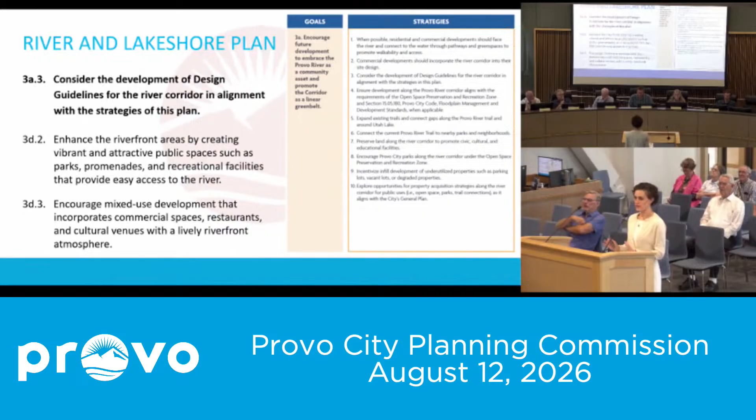Some of those are highlighted here on screen. The rest are fully listed in your packet, but this plan, the River and Lakeshore Plan, was very much the guiding document for the rest of the standards we're proposing tonight.

We had a working group to help us work through some early priorities and review drafts and iterate as we went along, including 3 councilors, representatives from each of the districts that border portions of the river, internal departments, as well as someone from the Utah Lake Authority and a commercial property owner. Their input was all included throughout and is shown in this final document.

We also ran the final documents past some developers who said that the design standards and ecological requirements here would not be burdensome at all. That was a unanimous point of feedback we got. They did give us some advice on specific design standards, market availability, especially as we were looking into the aesthetic design and sense of place.

A few did highlight the potential for infill development, where we have larger properties that border the river that, because of the large river setbacks, have large undeveloped swaths. They'd be interested in potentially filling in those vacant or grassy sections now with something that would help the public get a little bit closer, which is one of the major goals of the River and Lakeshore Plan and this document.

The objectives are fully listed on screen as well as in your packet, but it was essentially getting people closer to the river to let them linger and spend time and encourage development to embrace and face the river rather than simply backing up against it, while of course preserving its ecologically sensitive uses.

The plan is structured around 2 different categories broken down by the underlying zone. And because this is based on the underlying zone, we don't need to have any mapped or designated areas. As people apply for rezones, they will move from one area to another. The first is light use stretches, which are lower to medium density residential and open space.

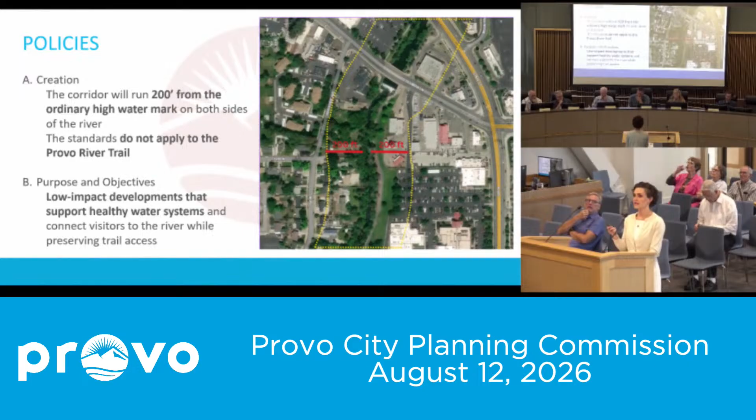The prohibited uses in both the high-use nodes and light use areas include industrial manufacturing, storage, warehouses, auto-centric business including auto storage, as well as car wash, dry cleaners, drive-through businesses, and data centers. The early input we got from our working group was that these are not compatible with the aesthetic and ecological and recreational value that the city would like to see for this river.

Setbacks and building height. We've got the table here on screen, so I won't go too far into it, but essentially the goal is that immediately adjacent to the river, we maintain some floodplain vegetated area, not allowing for permanent structures. Moving farther away from the river, temporary structures would be allowed, things like tables, benches, umbrellas, something that in a flood event could easily be moved and would not be a permanent threat to the property.

Going from there, from 40 feet to 100 feet, the height terraces up. This was suggested by our early working group as a way to mimic the existing planes and angles and scope as one is walking down the river, mimicking the tree lines, the canyons, and a sense of scaling up from the river so that you don't have a stark, tall building face immediately off to the side of you. Things would scale up to their normal height allowed by the underlying zone.

For a sense of scale, because a lot of that is a little bit difficult to visualize, they are marked here as well. On the far left is an image from the trail marked off on the distances, so you can get a sense of what it would be like for someone on the river or on the trail, how far away 40 feet actually is from that ordinary high water mark, with the trail included in that 40-foot setback.

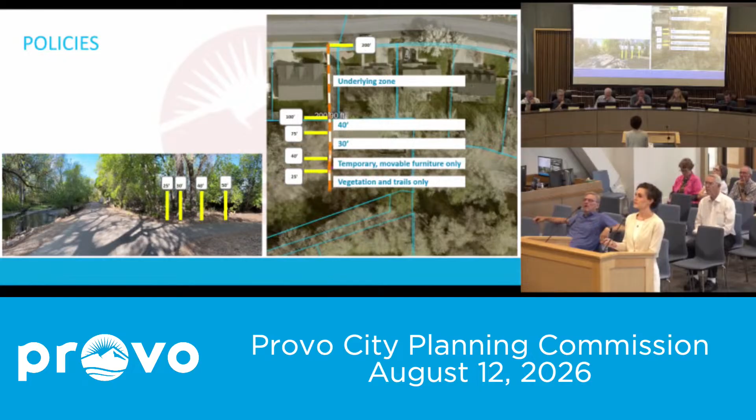We would maintain the lot coverage, landscaping, river improvements required of the developer as they are working with Parks, Public Works, and Development Services. But that was again agreed not to be burdensome to developers, by the developers themselves.

Getting into the aesthetic standards, this came up again and again in our early working group and in conversations with residents—to create a sense of place that is continuous along the corridor, but flexible enough for each development. The words that kept coming up were historic, natural looking, fresh, light, timeless, something kind of like Sundance, where anywhere you are on the property, there's a cohesive sense of place. You know you're here and it doesn't feel like anywhere else. But again, we wanted to make sure that this was not going to be a burden for developers or discourage the sort of redevelopment we want to see.

Here is an example. All of these specific points listed on the right are also in the full text in the exhibit in the packet. But you can see everything is stepping up with that 40-foot setback from the river with the temporary structures there as well. We encourage decks and exposed timbering, natural materials.

We also would require under this horizontal variation, that is where you see the building face here. Is there a light? Okay, here. No. If I hold it—there we go. Triple click and hold apparently was the secret.

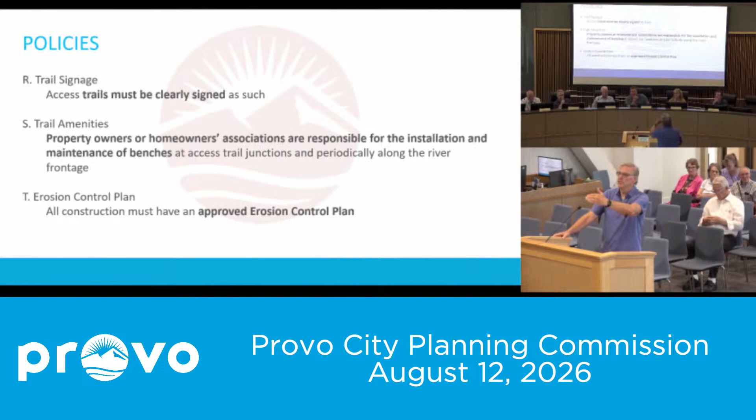All right, seeing none, we'll close public comment.

Hannah, I'd like some extra thought on how this applies to projects. There's probably no way to apply it to projects that have already received approval and are in progress. How quickly, if after approval, will we see this take effect with projects that are coming? It applies to any applications that come in after its date of adoption officially with the council, but doesn't apply retroactively. They have their property rights secured.

I'm not sure. I'll answer more generally and talk to him specifically afterward. It seems like he might be getting his answer. Okay, we're not sure where that property is.

As we were discussing, we're not familiar with his point of reference with the rental place, but current projects are always visible at provo.gov/planning. There's a hyperlink on the far right side at the bottom of the contact info text that is a map of current projects. Anyone can click there, move around the map of the city, click through and see what development is happening in that area. They can also see the planner assigned to those applications and call to follow up with questions.

Great, thank you. I believe he's talking about the warehouse development just west of Lakeview Parkway. That was my first guess as well, but I'm not sure. That should be it.

Any other questions for Hannah, or are we ready for discussion? All right, commissioners, who wants to start? Anybody having burning thoughts about where they stand on this or how they feel about it? I'm in favor of it.

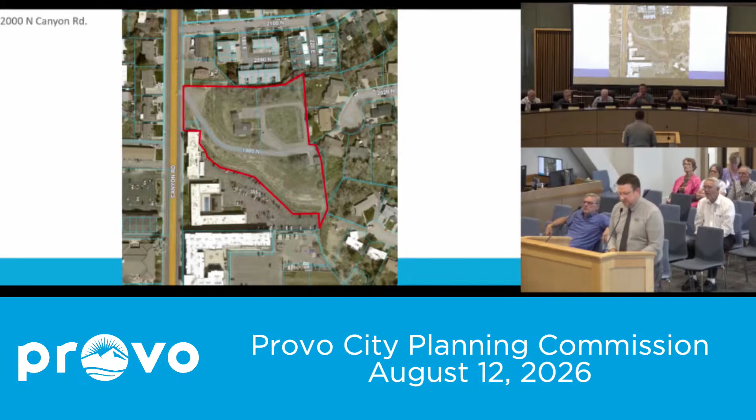And Dustin will present to start us off. Thank you very much. So this property has been before you recently, where 19 single-family homes were approved. They're coming back now with this rezone and concept plan for a 33-lot subdivision. That would consist of 3-unit townhome units, so 9 townhome units and 24 twin homes, totaling those 33 lots. Each of these has a 2-car garage with 2 tandem parking stalls, so that's 4 stalls per unit.

On the landscape plan, one thing I wanted to point out that wasn't in the staff report is the amenity space requirement that the LDR, low density residential zone, has. It's a 20% gross lot area requirement to be amenity space, with the caveat that it can't be within any of the setback requirements. So they do have a little bit of amenity space, but it's in the current setback area, so that wouldn't qualify. That's one issue not being met with the amenity space requirement.

Here's some conceptual floor plans that have been provided, showing the twin homes, and here are floor plans of the townhomes. These are again conceptual plans showing 4 units, but their current concept plan is just showing 3 units. Staff's understanding is that these are all 3-bedroom units. Here are the elevations, again with the one on the right showing 4, but their current plan has just 3 townhome clusters.

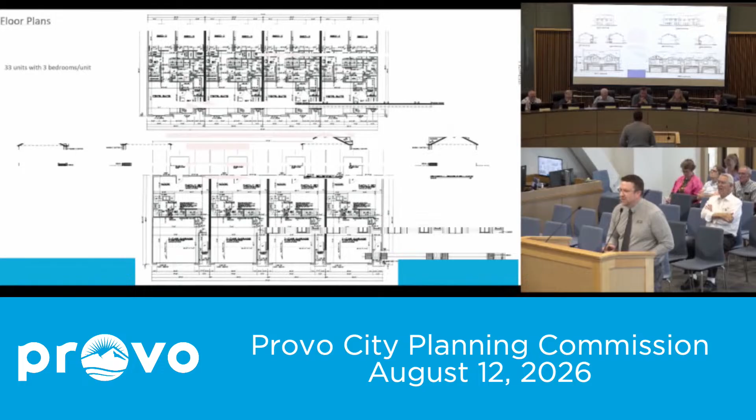As far as the current zoning, like I mentioned earlier, it was rezoned to the R16 zone for those 19 single-family lots, and their request is still going to be residential. The general plan calls for residential, so that complies with the general plan. But they're asking for that low density residential now. So any questions that you have for me?

Can you just clarify for us the current status? The slope has been removed—are you familiar with where it currently stands in terms of what's been happening on the site? I wasn't part of that, but another planner was. From what I understand, they're going through the process of removing the hillside, and there's work being done there currently. Is the slope currently stable? I know this was discussed at length last time about retaining walls, slope stability, and bonding. I'd probably defer to David Day with Public Works—they'd be more involved on that, but it's something they're currently working on with the work being done on the property. We can come to that later.

Questions at this point, John? Yeah, so you mentioned that it does not comply due to the amenity space. Are there other areas where it does not comply? In your report, you talk about public purpose best served by the amendment in question not complying—can you talk to that a little bit, and any other areas where it may not be in compliance? Yeah, just in the staff report and staff analysis, going through those.

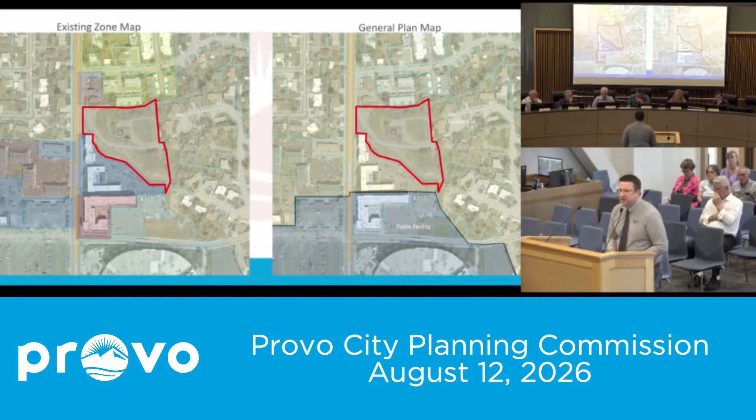Any concern about these private roads they're developing in terms of size or width? It's gone through our CRC review, but Public Works could comment better on that. On the north side, they have a fire access road connecting in there, which came from Fire and Public Works meeting those standards.

Can I follow up on that? How does that work? It looks like a pedestrian trail, but it's a hard enough surface for a truck to go through, since it doesn't look paved. Yeah, it's not for daily use, just for emergencies when they need access back there. Do they use a special surface the trucks are okay on, or how do you build one of those?

That's probably what could be done there, making sure it meets fire code requirements for fire apparatus to get back there. Those would be things fire would comment on if this went to project plan. Right now it's just at the concept plan, so we don't get into that much detail, but that was something required from fire.

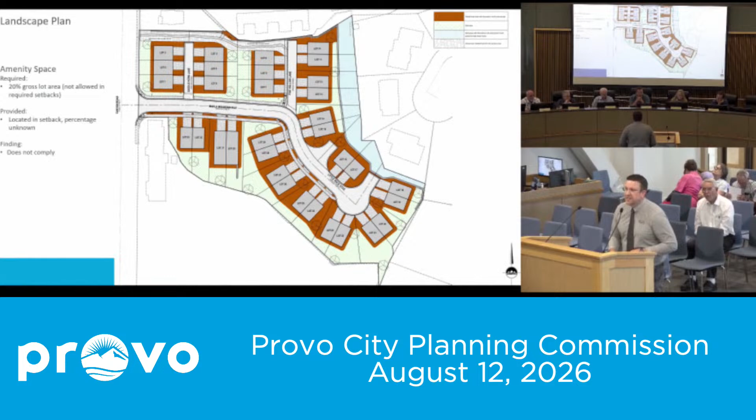Back to the width of the roadway, the city now has a minimum 30 feet width. Is that because this is a private street? Yeah, I think when this was submitted it probably was different—I was checking with David Day, who might answer better as far as the timing of when that changed versus when this was submitted.

Nothing on this has been approved yet, so how does that work if this is now not permitted in the city of Provo? Previously a private street could be 24 feet. If the regulation has changed since that time, it would increase. But moving forward, if this got approved, they'd be able to follow what was approved in the plans. Again, Public Works could answer that better than I can.

Maybe David, do you mind answering that question and the question about the slope, then we'll get to public comment. I have a question for David Day with Public Works. So the road width—the city council just revised that this spring.

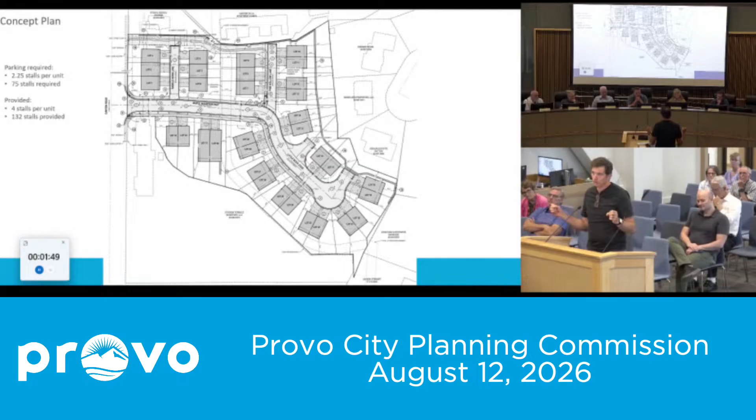Mostly what I want to do is let's back up and remember how we got to where we're at. They rezoned this to R16, and then the city removed the hill at taxpayers' expense—they did it for free. They did not, there's supposed to be a bond and a subdivision plat approval before any work is done there. That did not happen. The hill is now gone, and that hill was removed in reliance on 19 single-family homes, which fits in the neighborhood.

Now, the argument is there's other stuff around it. That's fine, but this is still a residential neighborhood. I don't see any reason why you couldn't do single-family homes with ADU—it sits within that zone, but they've got to enforce it. I think that actually alleviates more of your housing issues than this incomplete, as Paul said, 33 townhome proposal. So we were all in agreement with the 19 residential lots, and we should go back to that.

Thanks. Thank you. Any questions?

Howdy, I'm Ryan White. I'm the HOA chairman in Garden Villa, just north of here. We have a really vocal neighborhood, and a lot of people are expressing things they've already written in. They've called me or written to me, and I just wanted to echo their sentiment that they're ticked off about it. It just feels like if the developer had a concern about being able to sell these homes, he should have figured that out before he tore the hill down. That's all. Thank you.

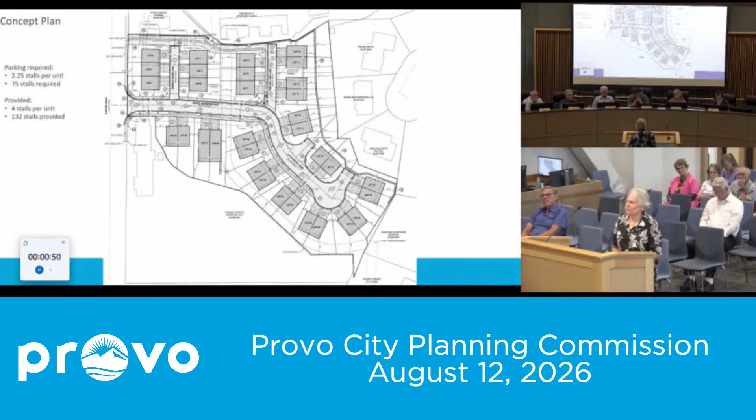This is really a good location being so close to the campus. But the closer neighbors don't really want more student housing in there. And I've seen the 4 or 5 emails that Paul Evans has sent out. I am very impressed by his articulateness, his research, and his evaluation of the plans of the developer. I think the developer needs to hire Paul if he wants somebody efficient.

I'm all for people having property rights. But what about the rights of the people who own property, who have already been there for a long time? Thank you.

Any other public comment? A letter, please. Sorry, I have to manage both systems.

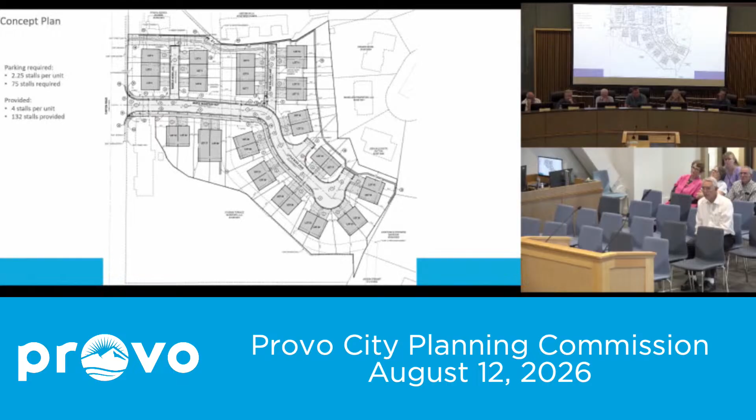I would also add that I imagine as they get into this, the one labeled turnaround easement just feels weird. It either should be parking or amenity or both. I can't imagine you need both that and the knuckle and cul-de-sac end. Can you tell what the slope is there? It's pretty flat for that, it was too steep for a sidewalk. But Mr. Wheelwright, my guess is that there's a fire code requirement that measures from this intersection a certain length, and then you have to have a turnaround. My guess is that's why that's there.

That's fair, but we can verify that before this goes to council. We can also verify this issue of vesting, and the dates look very close, as we've been looking at records while you've been talking. It's looking very close, so that's something we would have to verify before this gets to city council.

Okay, okay, thank you, Bill.

They should put a basketball hoop at the end of it.

Okay, so I have a lot of the same thoughts as John, that this is too much in this spot. I think everybody got behind 19 single-family homes. I understand that you might say, well, single-family homes don't belong here.

However, I'm not sure that this solves the problem. I think it creates more problems than it solves, because if they're going to be somewhere between $600,000 and $800,000, it's not affordable housing. So to me, more affordable housing would be allowing somebody to live in a larger home, have an ADU, and provide affordable housing for someone.

And this is an ADU area. So I think you could increase the density with single-family homes by allowing people to have ADUs, which allows them to afford the home as well. Whereas here you can't. How are you going to afford the home? And why would you want to pay $800,000 to be crammed in here?

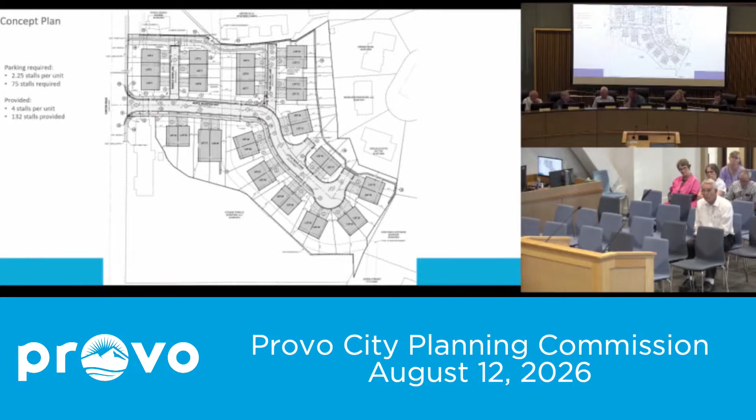Well, let me propose a motion. Can I make just two quick comments, and then I'd love to hear your motion. Okay. One is, like many of you, I'm just disappointed we're back here again. I think I understand why, having heard from the applicant today, but that's a dangerous precedent when the work's already started. Like it makes me a little uneasy, that side of it.

But I have been thinking, and a couple of the letters mentioned this idea of the housing ladder. I'm actually spending most of the day tomorrow in Salt Lake at an affordable housing summit to talk about this, because this is a serious and significant issue for all of us, for our children, for our grandchildren, whoever's coming along, in our city and beyond. This is not unique to Provo.

But the way the housing ladder works is if we build at the top, the theory is that others will move along the housing ladder. So it doesn't bother me to say, let's say we got 19 new $1 million homes. Well, that means 19 households somewhere else, maybe not all of them somewhere else in the city, would occupy these and clear out the spaces that allow that to happen.

So anywhere we introduce more housing, I think, is a benefit overall, because it helps the ladder move. I see some for sale signs, and I know interest rates are high and people are still a little unsure about buying housing, but I also don't see vacant houses in Provo or almost anywhere in Utah County. There is a shortage of good housing anywhere in the ladder because of how it helps people move about the ladder, make choices about where they want to live, raise their family, those kinds of things.

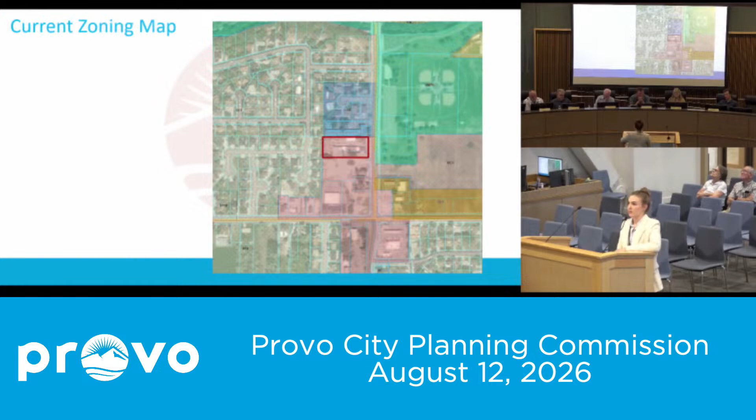This is the current zoning map. Currently it's zoned General Commercial. They're now proposing a Mixed Use zone. This is the general plan and future land use map designation, which is Mixed Use and Village Center Commercial. The way we look at that is this whole area should function as a whole, as a mixed use area. So with the apartments going in across the street, the neighborhood wanted to see more retail uses on this parcel.

This is the concept plan they've proposed. You can see 18 townhomes on the back side, and then 4 commercial flex spaces along Geneva Road — that's how they've labeled it. The townhomes would have tandem garages and 3 stories. The commercial units would have 500 square feet of garage space that could be used for parking on the ground floor, and then the rest of the ground floor space, about 600 square feet, as well as the second floor, would be flex office space.

The applicant has done this type of commercial development in other cities. They've seen it used for a lot of professional office type uses, as well as personal uses — man caves, that type of thing — and sometimes for personal services like salons.

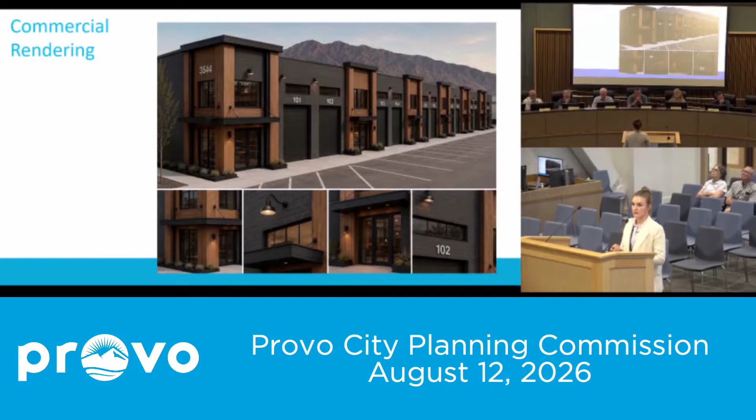Okay, could you go to the diagram? I had a hard time reading it in the copy I had. Could you go to the layouts of the commercial space, right there? What's the height of the first level, do you know? I don't know the height of the first level. I think the overall is 32 for the buildings, so figure half roughly — that garage was much higher than half, but I'd assume it would be half. I could ask the applicant that. Do you have a rendering of the street, what it would look like from the street? I do not.

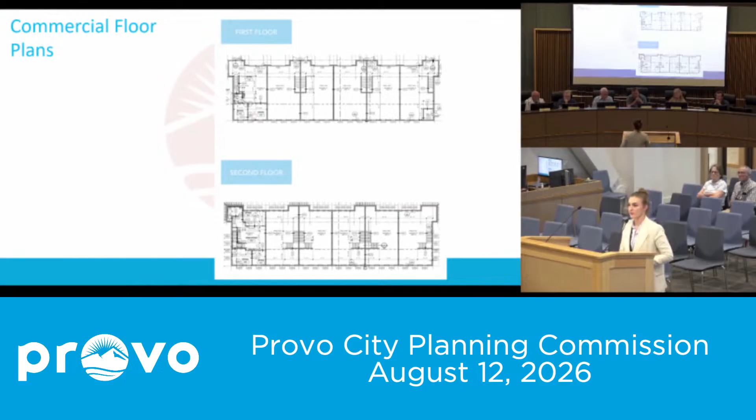I think the landscape plan shows sidewalks from the commercial units on the main floor to Geneva, but it doesn't look like that's contemplated there.

There is a sidewalk, there's no park strip, but there is a sidewalk just outside of what you can see here. Would there be plans to put a park strip to beautify that street section more than what we see right here? Not that I am aware of.

So if it's a village center, commercial mixed use, I would think you'd need to have pedestrian access and sidewalks and have a nice view. That's part of what makes it feel like a town center, not straight flat up high warehouse space, right?

Yeah, I do know that this is a UDOT owned road, and there may be plans to widen that. So I don't know about the plans for building a park strip or anything along there. At the very least, an extra wide sidewalk should be there, and it's a very narrow sidewalk at this time along there.

So could you speak about the heights of the buildings? I think the commercial were, what was it, 32, and the townhomes are 40. 40, and townhomes are 40.

Is there any concern, I'll get the term incorrect, but any concern about the shadow that these buildings will impose upon the neighborhood?

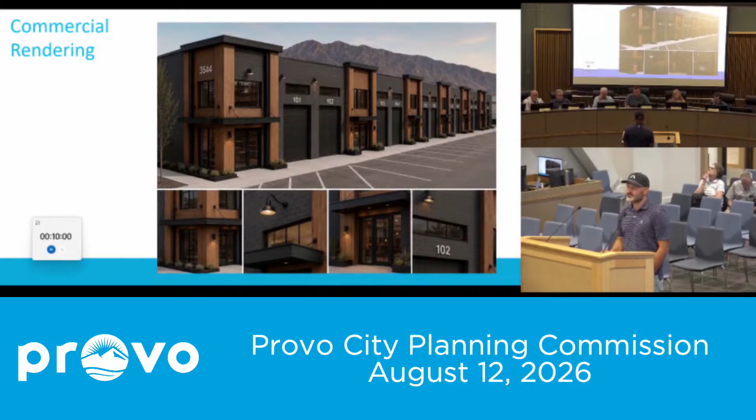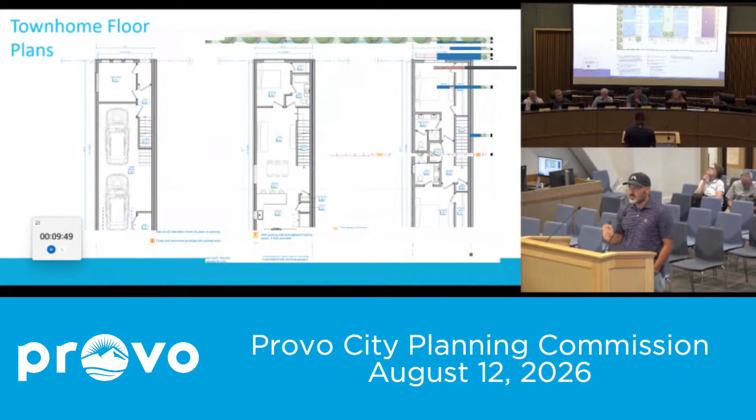Regarding the connectivity between parcels, we're sensitive to that. Regarding pedestrian connectivity, we're very sensitive to that too. I apologize, we don't have a sidewalk fronting the commercial on Geneva Road, but there will be a sidewalk there. We want connectivity between parcels, connectivity to Provo River Trail, Fort Utah Park across the street, and connectivity to the south of us too, which is exactly why we've laid out the parking the way you see it.

I can easily envision shared access in the future with a user to the south of us. So I feel good about that component of it.

Regarding the northern neighbors, I don't know if you've been to the site, but it's been in the family for a long time and it's a blight on the community. They know that, and they want to revitalize and beautify the area. There's a huge concrete wall separating this parcel from the townhomes to the north, and I've met with that HOA president, and they despise the wall.

They're happy that it's going to come down and that we'll have more compatibility between the parcels. Whatever type of fence or wall we decide to do, we'll work with them on that. But I'm excited to see that wall come down too.

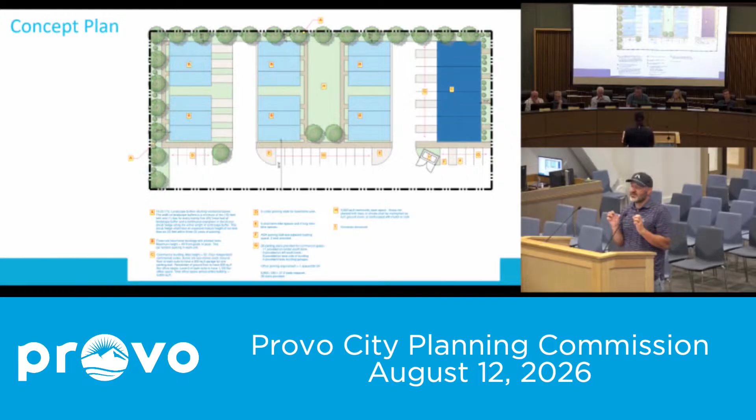You're almost first though, so yeah. I mean, we'd like to set a precedence, you know, from an aesthetic expectation. So this is going to be a nice product. You'll have various exterior materials, metals, brick, block. It's going to look nice. And so I want the experience to be as inviting from a retail perspective as possible.

Which is why I love, if someone wants to have a showroom for something, this is like a perfect product to do that. A lot of glass, a lot of light, coming into the building and out of it. So...

The aesthetic is going to be mirrored kind of between the two products. So with the landscaping in front, I'm kind of excited about what it's going to do aesthetically to the area. All right, thank you. Right.

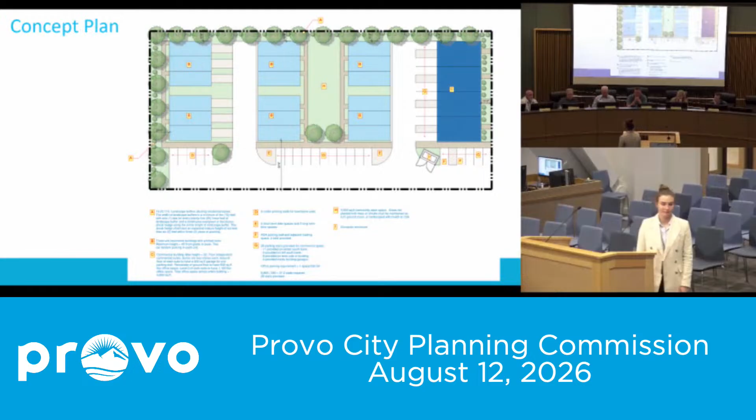Seems logical you would, based on where you're at with this kind of island effect, right? I think an amenity in that central area would be needed. I could see a pavilion area being very popular there. There is a little park across the street though. A little one, that's true, but eventually that'll be a 5-lane street you have to cross to enjoy that park.

Megan, to follow up on that, you said they plan to expand Geneva to 3 lanes, but it's already 3. I'm not sure what that cross section looks like, I talked to our traffic engineer just shortly before this meeting. I wonder if he's thinking up north where it's 2, because right there it's already 3 with parking on both sides. Maybe he's thinking north, where it would be expanded, which in that area means you just block parking on the street and then you've got 5 lanes. Harder to cross, but it also means they don't have to use eminent domain on our new commercial spots here just to widen the road. I'd assume the right of way goes all the way to that property line now, so they can do whatever they want in that space up to the sidewalk.

Can I ask if you want to take a straw poll about continuing? Because last time it seemed like the neighborhood was concerned there wasn't enough traditional commercial opportunity here, and I'm not sure we get too much commercial here. So I think you could just make a motion and we can vote on it. My thought on that is, I'm sure the reason he's here is because of the meetings with the neighborhood. We used to meet every month back when I was the neighborhood district chair.

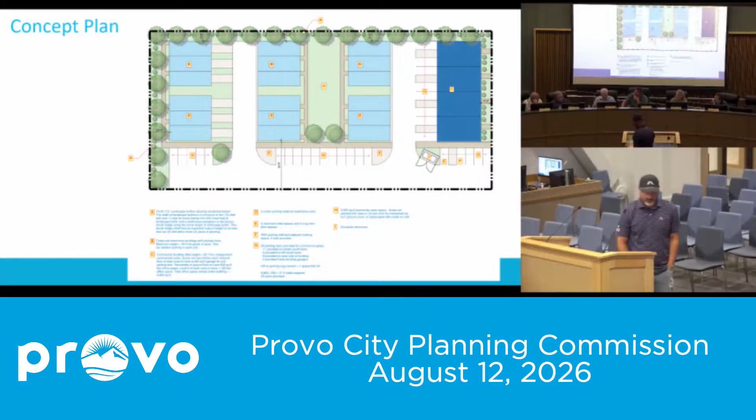My thinking was similar, that if this was the first time we'd seen a project and the neighborhood hadn't commented at all, I'd agree we should continue until after we hear from them. But because this is related to what they had before, we've seen additional comments, and the comments they raise are real but similar to ones we already saw. So I don't know if additional comments right now are critical for us. I know some might think differently, and I respect that. But because the comments will come in time for city council, I was willing at this point to go forward without additional neighborhood comments before we make our decisions here.

My understanding was that meeting with the neighborhood is not mandatory in order to proceed. It's not, but as a former neighborhood chair I really appreciate the process. I agree, but I think I'm on the same page with John. We've heard a lot of the comments already, and if there's anything really significant, the city council will hear it. I'm fine either way, I can go either way.

The other issue they raised, which we spent time on last meeting, was traffic concerns about getting onto and off of Geneva Road in that area, and whether there'd need to be a light with this many additional vehicles. We talked about the road plans and neighborhood concerns, but those were alleviated in my mind because this area is planned to become a village center, so the roads and infrastructure need to be created for it. Since that's the direction the city is taking, this feels like a good initial step toward that. So I didn't feel the traffic issues, even though real, should hold this back. They need to be identified and resolved, and this is a vehicle to start that process.

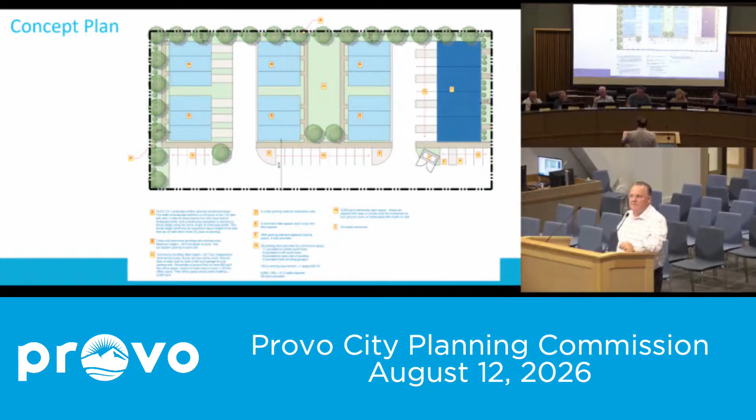Just for due diligence, do you remember for townhomes how many trips per day we expect as our rule of thumb? There's a rule of thumb number we use per unit. Our Provo City trips per unit is 11.4 per day. When you get to three stories and above, which this isn't, it drops to 8.5, but this would be 11.4, so about 200 cars per day - number of units times 11.4. So 200 per day isn't a ton, that's one every 6 or 7 minutes. Except that's not how they're distributed - they're not evenly distributed.

We want to make a motion. You want to straw poll the continuing? Well, the continuing, I guess, in my opinion, thinking this through, it's an unfortunate consequence of moving to a 3-month cycle. But I don't want to create a precedence where we can't move stuff forward in this city ever because they have to wait 3 months until a neighborhood meeting. So it's unfortunate that that's the schedule, but I can't control that. Agreed.

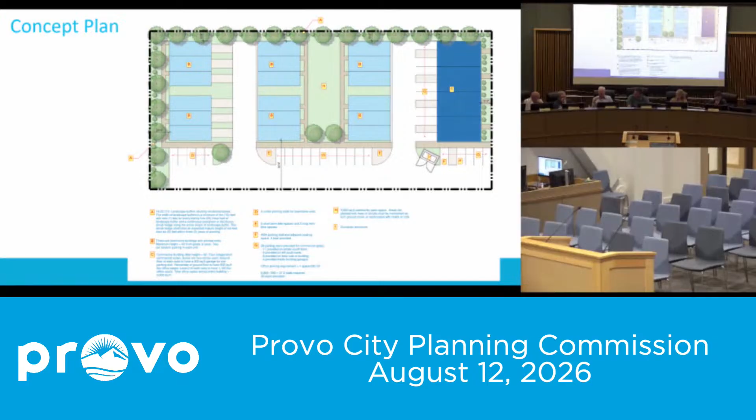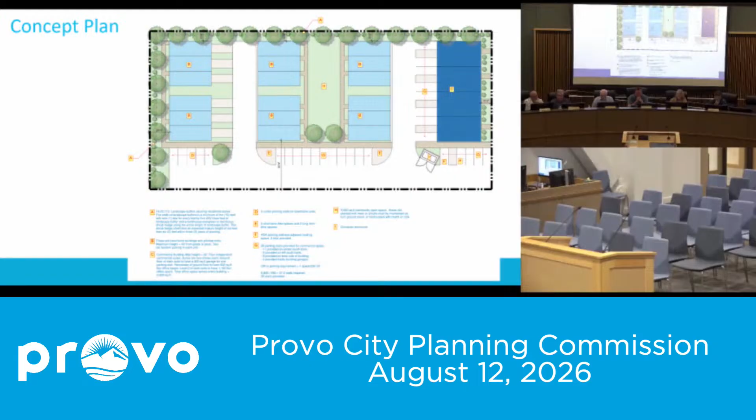Motion? I'll make a motion if we're ready for it. For item 4, I move that we recommend approval. The proposal is consistent with the general plan. So the Planning Commission recommends approval to the City Council of the zone map amendment from the CG zone to the MU zone for the 1.32 acres of land at 113 and 191 North Geneva Road. I second.

Any comments on the motion? We'll get started with the voting. Sorry, the motion was to approve, recommend approval. Okay, aye. Aye. Aye. Aye. Aye. Aye. That motion passes 6-0.

On item 5, a motion. Guess I can go again. Do we have any discussion on the concept plan before we make the motion? We've had a lot of it already. I'll just make a motion and see where it goes. I move that the planning commission approves a concept plan for 1.32 acres of land at 113 and 191 North Geneva Road.

Second. Thank you. And just for confirmation, if the city council denied item 4, then item 5 would become kind of null and void, right? Okay. So we've got our second. So Joel? Aye.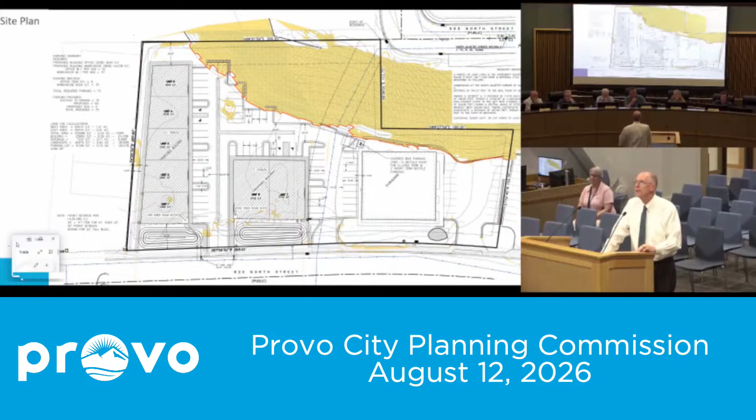It might be worth noting that we can probably give you the parking demanded for the 80-20 ratio that zoning calls for, even if we didn't get the retaining walls. But we'd like to have a little bit more parking — it allows us to add 3 to 5 spaces, and circulation will be a little bit better. Cars will be able to back in and out of those top spaces a little bit better.

But my recollection from discussions with Northern Engineering is that those 2 smaller walls to the east are actually only scheduled to be about 4 feet, and they would be engineered accordingly. The little bit larger one would be about 6 feet.

Thank you. In the engineering and development of those walls, is there any additional issues to the slope we should be concerned about?

No, I don't think so. I'll express it as my personal opinion, having been out there on the site, there's a considerable amount of undocumented fill throughout that area. We don't know what the natural slope was and exactly where the toe ended. It's possible that the toe of that slope is now actually steeper than it was naturally. This is a chance for us to shore that up, and I think you'll end up with a better and more stable product than what you've got now.

Any concern about the hillside itself and the property? I'm not sure what to ask - erosion, or water during heavy snows or rains, or things like that.

I mean, it's been subject to erosion before. You've got your wet utility, your storm drain, your sewer coming down through that easement. From experience, I looked at that mat that was put in there and what was seeded and has grown up. On top of that easement, I doubt you've got root structures deeper than 4 or 5 inches maximum, which tends to be ineffective, but that decision was made some time ago.

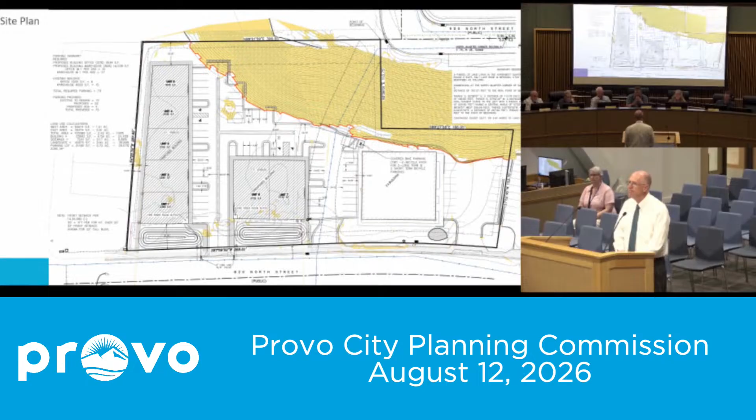Hi, Rachel Breen, Provo. I actually worked in that existing building for many years. Me and Na worked there for many years together. And we worked there right after the flooding, the big flood they had on Grandview Hill that took away that hillside. Actually, most of it landed right near that building.

So I really appreciate the plants, I appreciate the retaining walls. As far as I know, there hasn't been a problem since that weird rain flood thing we had. I love the buildings because it was super creepy with that field when we worked in that building before. So I'm excited that there's something going in there. But no, it just looks like a good project. I just wanted to come and say I'm excited that something's finally going in there. So I have many fond memories of that building.

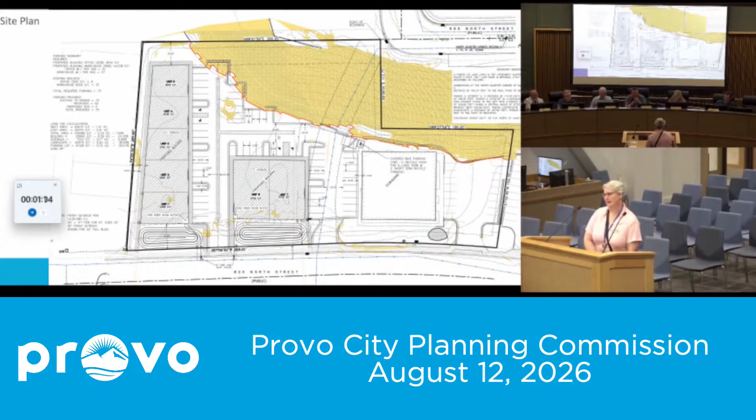Questions, discussion, Jonathan? Yeah, so this is on my commute to work, I drive by there when I don't bike. And I've always looked at this lot and wondered, why is it vacant? There's one across the street that I'm always like, why is it vacant? So I'm glad to see some action, something happening in this area that might create some energy and see some of the other buildings cleaned up, et cetera.

In fact, I'm excited to see that building cleaned up that does exist there. And I'll be honest, that barely looks like developing on the 30% slope, it's barely touching it. Erosion can be a concern there. I know there's a mat there with some growth on it, but that's a separate issue. I don't think this is going to worsen anything that's there.

Tosh? I agree with Jonathan. I'm from here, and I thought, man, in my lifetime this will never be developed. There's certain properties that I thought would never be developed. So I'm excited to see this come through if it happens.

So this is right across the street from the high school, right? Or the Freedom. The Freedom, yeah. Is there any concern about that? No, I think it was Freedom's choice to build there among all these. It fits every other building in the area better than Freedom does. Yeah. Good. So.

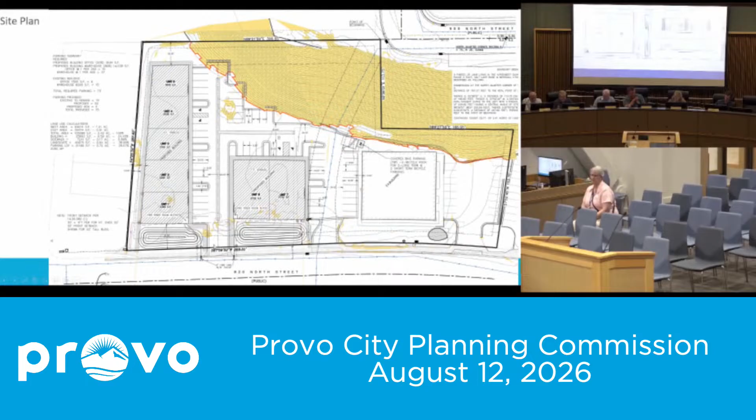I'll make a motion. Please. I move that item 8, Bret Nelson requests project plan approval for a 7-unit flex office development in the manufacturing park zone, Grandview South neighborhood, that we approve the proposed project plan and the variance to build the 30% slope as shown on the site plan with the following conditions: Number 1, a plat is recorded that combines the 2 parcels into one. Number 2, remaining CRC items are addressed and CRC approval is given. And number 3, a note for a 6-foot decorative masonry wall between residential properties added to the site plan. Add the note for the 6-foot wall.